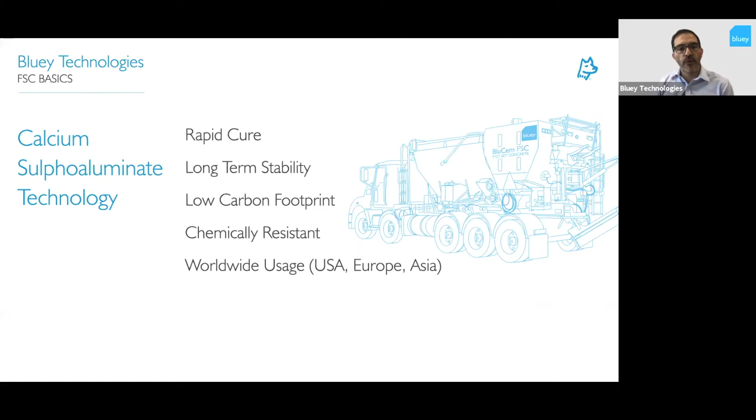So it's based on calcium sulfo-aluminate technology, a type of cement that provides rapid cure, long-term stability, a low carbon footprint, and less energy to produce than OPC cements. It's chemically resistant, and it also has worldwide usage over a number of decades now throughout USA, Europe, and Asia.

FSC, fast set concrete, what is it? What are we talking about? So it uses that CSA technology. It's a fast set cement binder system, and we use that binder to form a range of products. Products ranging from fluid grouts, which have a really pourable, highly pumpable consistency, available in 20 kilo packaging just to mix with water. Micro concretes as well, with small aggregates that can be used for small repairs, also a pre-bag product.

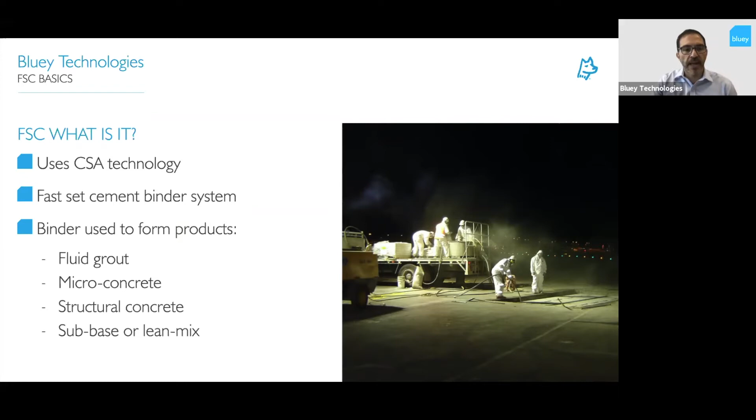Structural concrete, which is applied using weigh batching units, which we'll go through in this presentation. And we can also produce sub-base or lean mix for road applications. So there's a range of products that can come out of this fast set technology powder. It's just a new type of cement system.

So looking at the Australian experience and what we've completed here, and this is for our Southeast Asian participants, just to give you a bit of an update on what we've done. So back in 2005, it was probably one of the largest single applications of a fast set grout in the country. And that was when we upgraded Sydney Airport in readiness for the A380s, which were coming.

And you can see there a picture of General Holmes Drive, which is a tunnel which runs across the main runways and taxiways. Quite a length to it and crosses quite a few taxiways. It had to all be upgraded over a 6-month period for strengthening, and a fluid grout was used in that application to cast in precast beams, which would strengthen the actual tunnel. So that was the first really large application.

And in 2012, there were airport slab replacements which were undertaken, and that was the first use of a volumetric truck. And the volumetric trucks were a little bit in their infancy in Australia and have come a long way in the last few years, through to 2017, where we've had the first mobile weigh batching units. So they actually weigh the products as they come out rather than relying on volumetric scales to measure. So a lot more accurate by the time we got to 2017.

And then on the back of this accuracy in 2018, we saw a lot more application in airports, but also approvals by road authorities in Australia to use these products for road slab replacements, knowing that they could get the reliability.

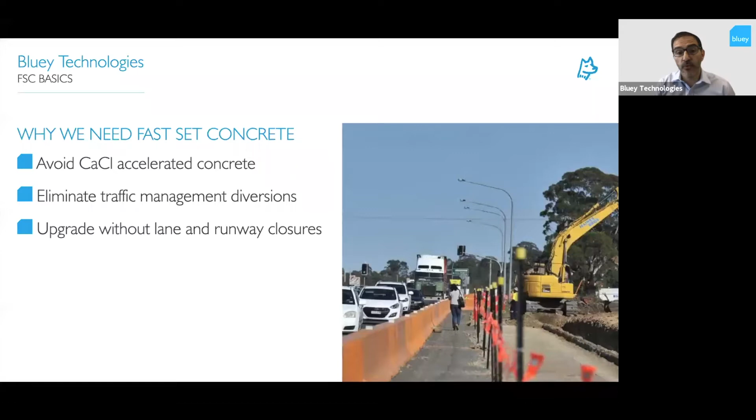So some of the advancements that have been made over the last couple of decades in this area is that the manufacturing process has improved a lot, so we can get far more repeatable results out on site in terms of strength gain and durability as well. We can demonstrate a 100-year design life for these types of products.

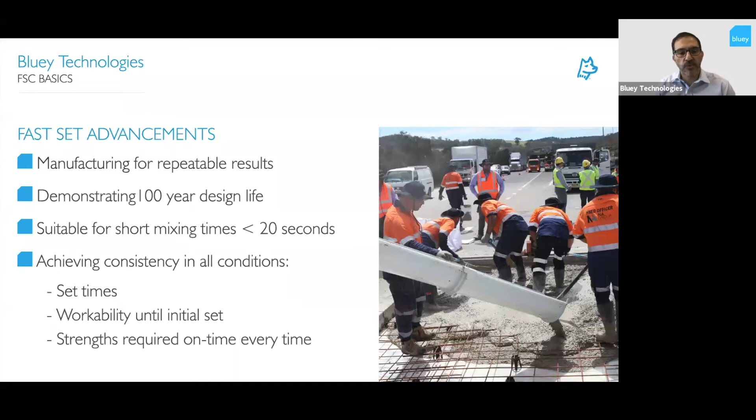We've shortened the mixing time, which makes these products suitable now for volumetric mixer application. I'll talk about that as well. And we can achieve consistency in all conditions. So the set times, the workability, and the strength development, whether we've got cold temperatures in the south of Australia, down in Melbourne or Tasmania, or whether we're working in Singapore or the Northwest Shelf at 30, 40 degrees temperatures, we can still achieve the same sort of strength development and set times. And we'll talk about how we achieve that as well.

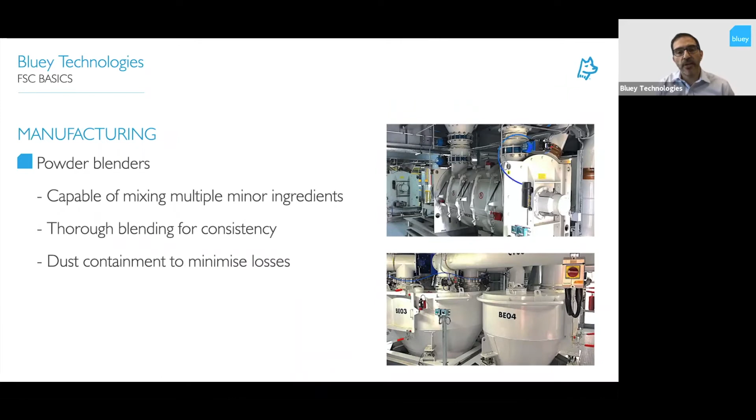So let's have a quick look at the manufacturing facilities. So the powder blenders that we use for this cement technology have to be capable of mixing multiple small ingredients very thoroughly. So the types of cement blenders we use are actually from the pharmaceutical industry, not from the cement industry, because they're more accustomed and better designed for mixing the product thoroughly. So the type of mixing devices are really important.

On top of that, we have a lot of controls in place over our raw materials that come into the factory upon delivery, but also we do a range of testing, not only during manufacture, that's an obvious one. Every time you manufacture the product, you have to do your full range of testing on each batch. But in addition to that, we're going through the factory. Every month, we're pulling out all the raw ingredients and we're doing type testing.

Now, type testing is something you would normally do once when you develop a product, but we're now doing this every month. And the reason for that is so that we can have constant data on the raw materials we're using in advance of them being applied on site. So we will already have the 28-day strengths before that product is manufactured and sent to site, which means that we get much more reliability and can identify trends and patterns in the raw materials over time.

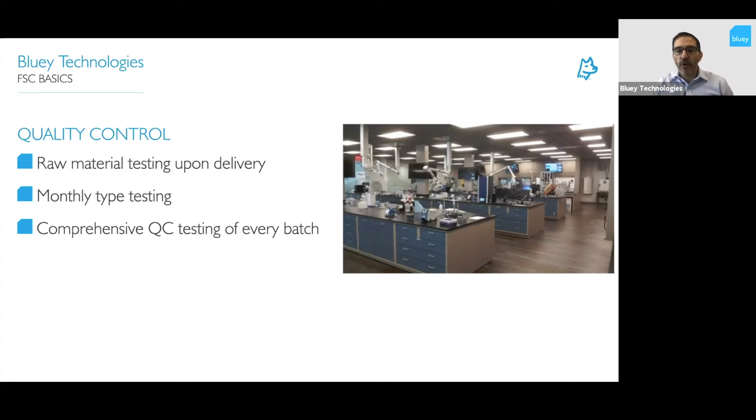So we've got that data, which is being done monthly, and we're also testing every single batch that comes out. And when we say every single batch, each batch would be around half a ton of powder. So that's a lot of testing.

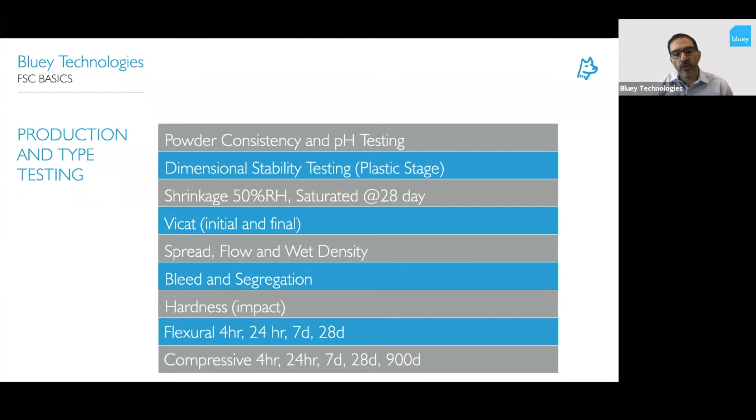And the type of testing we're doing, just to summarize some of those tests here, we've got powder consistency, we've got dimensional stability testing during the plastic stage, we've got shrinkage testing, bleed and segregation, hardness, and then obviously the mechanical properties of flexural strength and compressive strength. And doing that testing early gives us the opportunity to get that long-term testing before the product goes out to site and is put into application.

Durability for a longer design life. Now, I've got to say that 20 or 30 years ago, it was hard to believe that you could achieve fast set and a highly durable product all in one. It seemed as though you either had one or the other. But now we can actually say that we've got fast set products that are durable, will last the life of the structure. Previously, there were issues associated with fast set.

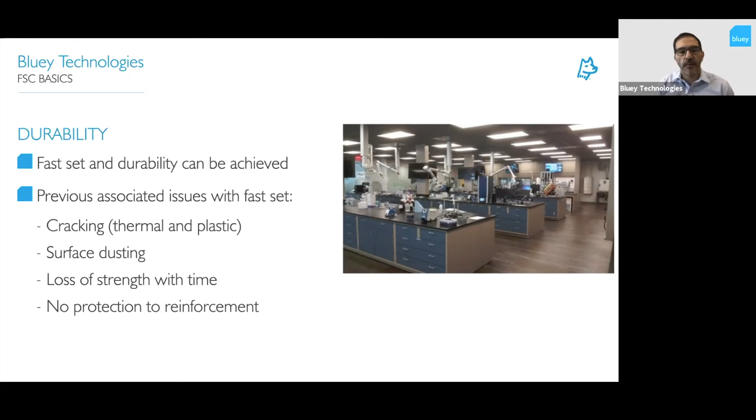People would see that you would get cracking, thermal and plastic, you'd get surface dusting, loss of strength over time, and they wouldn't provide any protection to the reinforcement because either they had chloride-based accelerators which would attack the reinforcement, or they wouldn't be alkaline, so they wouldn't provide that alkaline environment to passivate the steel. So these were all issues that were associated previously, going back maybe even 10 or 20 years. Now you don't see that.

CSA cements are very, very low shrinkage after initial set. We're talking shrinkages of around 200 to 300 microstrain, much, much lower than what you see out of concrete. But the standard shrinkage test in that regard isn't fully adequate. It gives you an idea of the shrinkage that happens from 7 to 28 days. And yes, CSA is a very low shrinkage in that zone.

But what's happening in the first 7 days, and particularly with something that's curing so rapidly, you really need to know what's happening. So we do a volumetric stability test during the plastic stage, and we're actually monitoring the volume movement and change during those early stages, because we know that that's a high risk with calcium sulfoaluminate cement systems, is that you can get plastic cracking in those early stages. Some of you may have had experience in seeing that out on sites. If the product is developed well, you won't see that plastic shrinkage cracking.

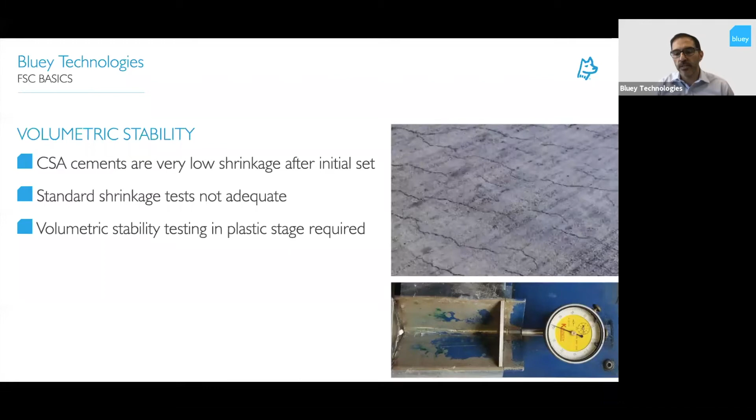So all of this leads to us looking at how we can determine the 100-year design life. And there's a lot of factors that we've tested and put forward as reasons for making that assertion. So the shrinkage on the product, as I mentioned, is less than 300 microstrain. We have a very low chloride content, so we know that's good for the steel reinforcement, less than 0.005%. It's low in soluble alkalis, and we have no residual sulfates.

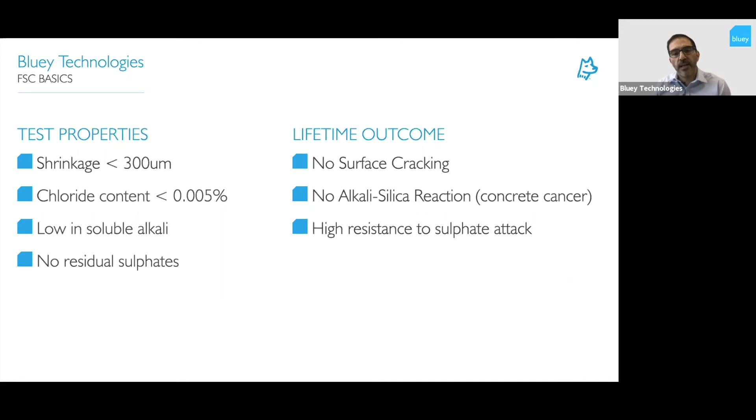So the lifetime outcome for those items is that you have no surface cracking, you have no alkali silica reaction, concrete cancer, and you have a high resistance to sulfate attack. So we know that those bases are covered.

We also complete NT443 testing, and we know that we have a very slow migration of chlorides through this type of cement system. We know that it's very high density, and we know it's low in permeability. So we also have no surface dusting and excellent wear resistance. So again, all lifetime properties that we know will lead to a longer life outcome.

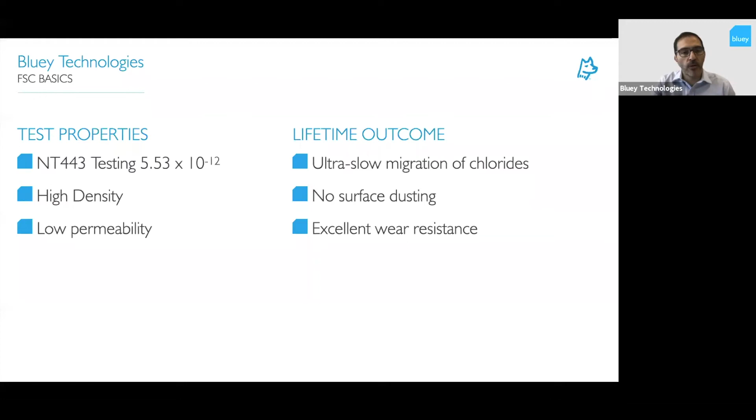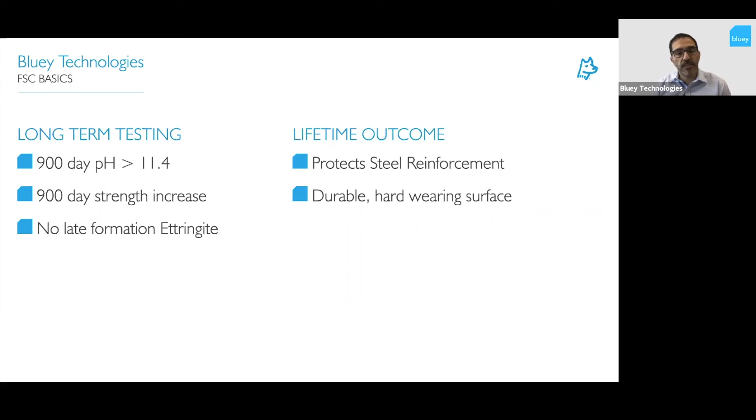On top of that, we've done long-term testing on pH. So we know that the alkalinity is maintained for more than 900 days. And we also know that we have a 900-day strength increase, and both of those things lead to protection of the reinforcement and a durable hard-wearing surface. On top of that, and finally, we know that we have no late formation ettringite, which can be a question around CSAs and needs to be tested for prior to delivery of the product.

So what we look at is the long-term testing, and most people are only interested in fast set cement. You know, what's happening in the first few hours? What's my strength at 2 hours? What's my strength at 3 hours? Sometimes they might ask you, what's my strength at 28 days, but not very often, because by then the item is usually put back into service and forgotten about.

But long-term strength gain is actually really important in these products because the reaction actually continues over a reasonable period. In fact, the strength keeps gaining for many days. You know, we've gone past our 28, 56, 112, 224, 448 days, and we're still seeing a strength gain. So there's still something happening within the product. There's still a reaction occurring. And we know that doesn't level out until around 500 days when the reaction is complete.

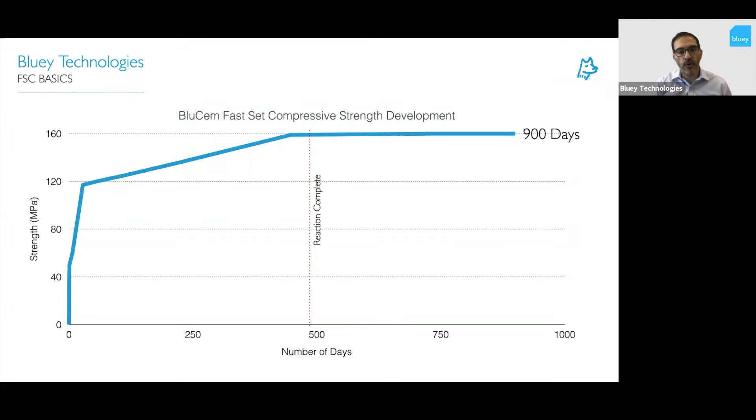So what we want to make sure of is that the actual reaction that's occurring between 28 days and 500 days isn't having a negative impact, because we know that that's when ettringite is forming. And if you have an oversupply for that ettringite crystallization, then it can break down your cement structure. And if that breaks down your cement structure, then it can lead to a reduction in strength over time, like this. And this has been seen, if we go back maybe a decade, 2 decades ago, in some CSA systems where the strength gain after a couple of years was noticed to drop off and there was powdering of the surface and a reduction. So this is something we avoid by doing the long-term testing.

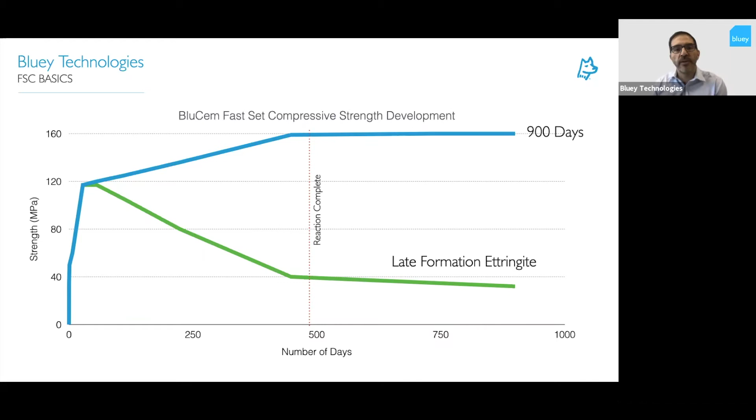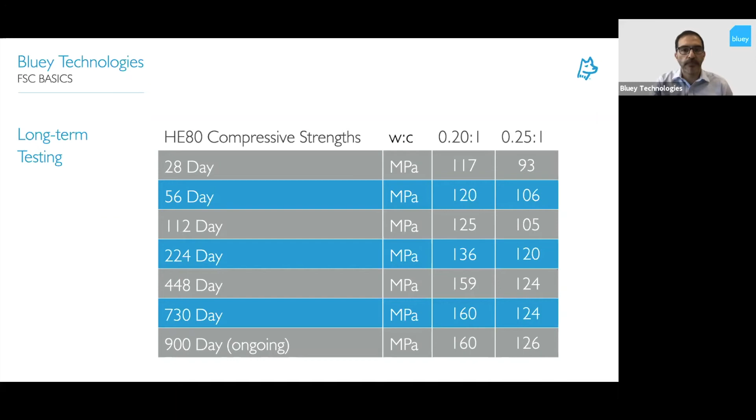So looking at some of the application systems, I mentioned volumetric trucks earlier, and these have changed the way we apply fast set products, but in themselves, they've also changed, particularly over the last 5 years or so. So what it is, you have powder and aggregate bins, which are separate. So you have your cement powder, and your sand and aggregates, which are put into separate bins. They drop down into an auger, and then that's mixed off a conveyor belt through that auger, and the mixing actually occurs at the point of placement. So we're not adding water to our powder until we're actually ready to place the concrete. And what that means is you have unlimited travel time with the products.

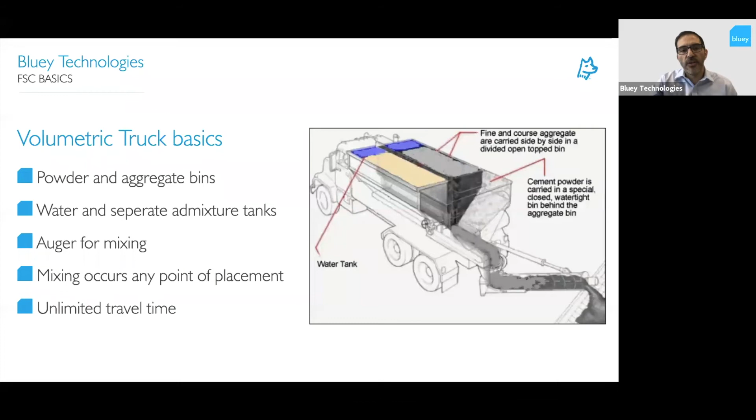Whereas if you were using a concrete agitator truck, you would have to put all your powders in, put your water in, and drive it out to site and hope you got there fast enough before the product went off in the truck. So that's the difference with a volumetric based truck, which has now turned into a weigh batching unit, because there's been some equipment advances in this area.

We now have computerized mix design and calibration, so it's all controlled by a computer. The trucks can move and pour continuously, so you don't have to stop the pour to move the truck forward. And that's a really important feature to maintain consistency of your pour and avoid cold joints. And we also have continuous weigh batching on the powder bins, which is what I mentioned was the really big advancement where we went from volumetric trucks to weigh batching units.

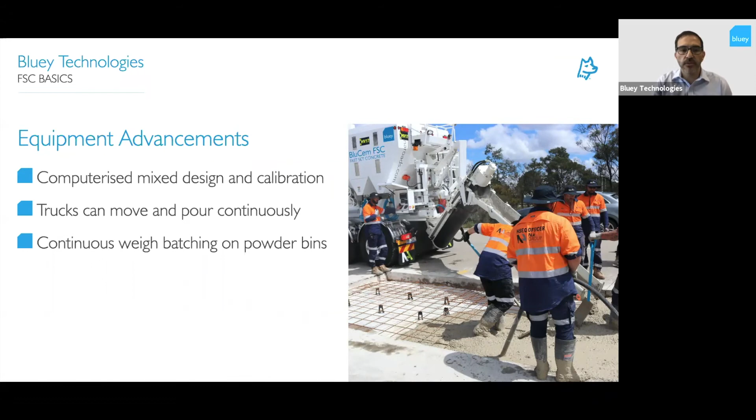And what that means is that on your powder bins, you have load cells, which are continuously weigh batching the powder as it's delivered from the powder bin. And it gives you really high accuracy on that powder delivery, which combined with electronic controls over your water delivery gives you an extremely accurate water cement ratio all the way through your pour. So you know you're going to get the strengths you want, you know you're going to get the consistency you want all the way through the delivery of that product.

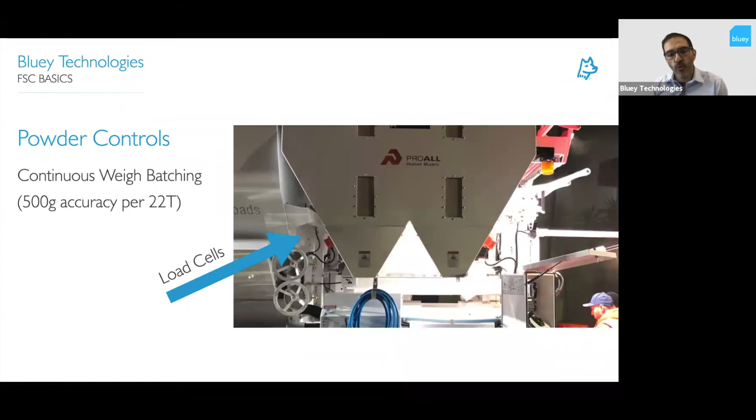Besides the trucks being advanced, we've also had material advancements, as I've touched on already. So the total mixing time now is less than 20 seconds with these trucks, as opposed to with an agitator truck, which might have been mixing for even up to 20 or 30 minutes before the concrete was poured, or where you're using a grout mixer where you had 3, 4, 5 minutes of mixing time before you had to apply it.

Now you can see in that photo the little black section there, which I'll point to with my arrow, this section here. This is an auger in here, and the powder and the water all gets delivered into that bottom point there, and then it gets shuffled up this chute, and as it's getting shuffled up by the auger, it's also mixing at the same time. But it only allows around 20 seconds of mixing time.

So we've had to put additives in the product and change the way it was designed so that we can improve the, let's call it mixability of the product. So we've changed the ingredients to suit that application. And full mixing means that you achieve more consistent results. So you're getting more consistent set times, you're getting more consistent rheology, and you're getting more consistent strength gain. And mixing is a really important part of that.

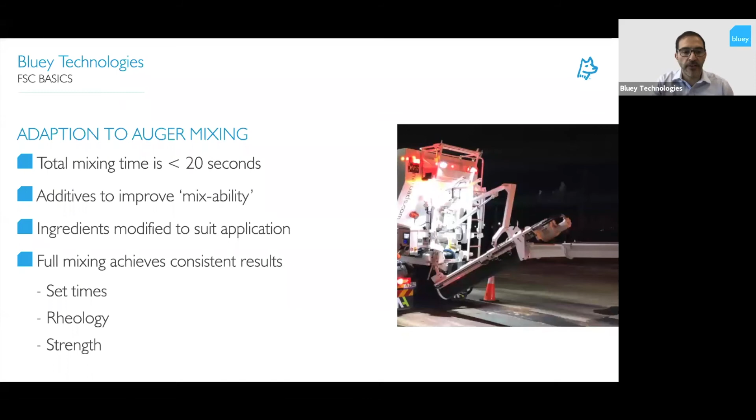We've also added some changes to the raw ingredients. One thing we realized was that the product itself on mixing was changing in its rheology over time. So as it came out, it had a fairly low slump. And then after about 2 or 3 minutes of vibration, it had a really high slump. And what we're finding is that the plasticizers that were being added in a powder format were taking a few minutes to dissolve. So we actually converted those to a liquid plasticizer, which means that they were active immediately.

They're part of the computer-controlled delivery process with computer-activated pumps so that we know we're getting the right delivery of plasticizer. And that allowed us to get a much more consistent product for finishability, workability, and spread as well in the slab. So we're getting much more consistent results in our rheology now.

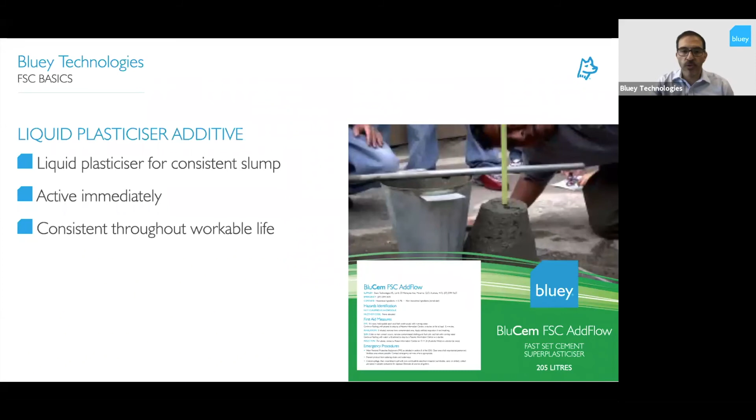One of the biggest changes we've made though to the product is the liquid dosed retarder. So the product has always been retarded using a powder retarding agent, which was added at the factory. Problem with that is once it's added at the factory, it didn't matter whether you had a 40-degree day or a 5-degree day, which honestly can happen in Melbourne, just wait for it to change. You were stuck with that powder that was delivered. You had no control over it.

So every 10 degrees of temperature change in the ambient temperature would either double or halve your set times. So if you were hoping for a 30-minute set time and suddenly you had temperatures which were 10 degrees hotter than what you were expecting, you would only have 15 minutes of work time. And that's a pretty big hit to take in terms of the amount of work time. And then on the other hand, it could go the other way as well, where you don't develop the strength in time.

By adding a liquid retarder with controlled dosage through the truck, we can actually set the amount of retarder that we're adding to the powder so that we can set the work time to suit the ambient conditions. So whether we now have a 5-degree day or even closer to 0-degree day, or a 40 or even 45-degree day, which we've worked in before, we can actually have a set time set at 30 minutes or 40 minutes as per the contractor's instructions.

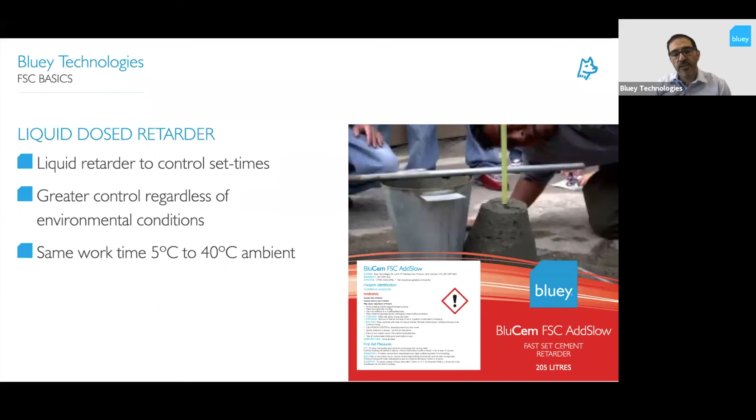So we can now modify the set time on the product to suit the ambient conditions, which has made a really big change to the way we use fast set products. Just a summary of the properties that we achieve in terms of compressive strength and flexural strength at the different times, just in this table here.

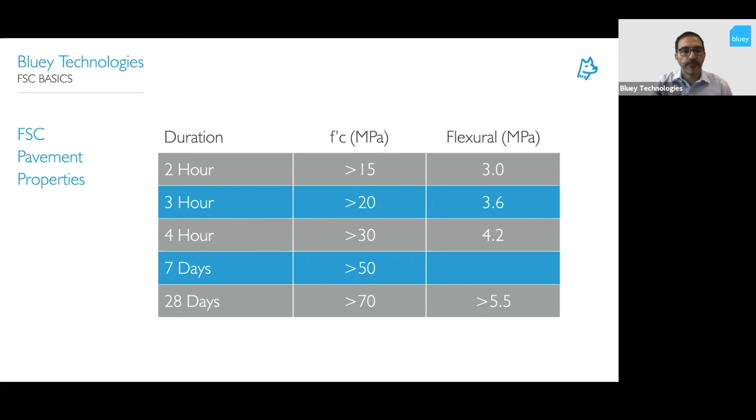So moving on to site testing, just to finish up, and I won't go into too much detail on this because we're actually presenting in full on this topic tomorrow at the same time on maturity testing and why it's required. But site testing does come with some challenges when you're talking about fast set products. One, the work is being done of an evening, so your laboratories aren't naturally open. They have to be open for the work.

On top of that, you can have cold temperatures. It also means that you have to transport the cylinders quickly to the lab without damaging the cylinders or having an effect on them. And the chance of that cylinder being representative of what's happening in the slab is pretty limited in this type of application when you've got such fast set gain.

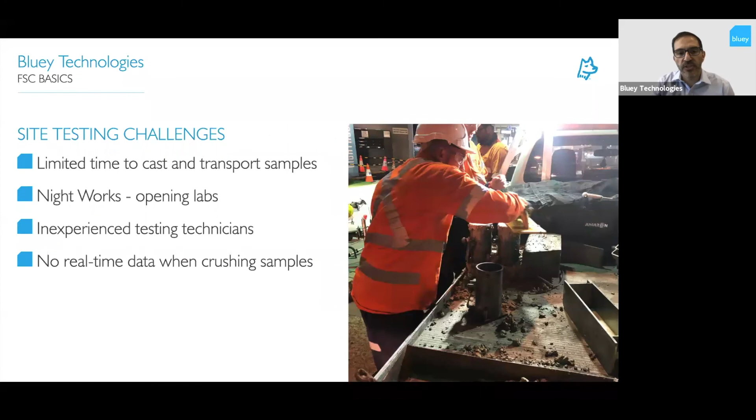And what we'll show tomorrow when we're talking about maturity testing is that there's a difference in what you find in cylinders compared to what you're seeing in the slab in terms of strength development. And there are ways around measuring that. So we need real-time data when crushing these samples is what it boils down to.

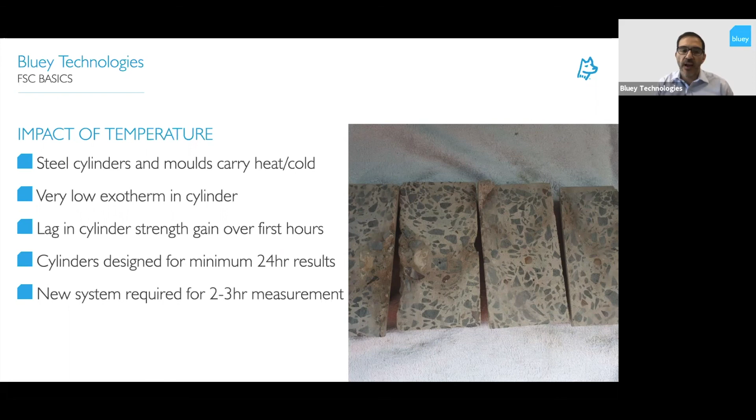The cylinders have low exotherm. They actually hold a lot of the cool. They don't allow the concrete to generate its natural heat, which means there's a lag in cylinder strength over the first few hours. So the cylinders aren't truly representative of what's happening in the slab. Cylinders are old technology, and that's why we needed this newer system for 2 to 3 hour measurement, which is our maturity testing. And again, we'll talk about this in the maturity testing presentation.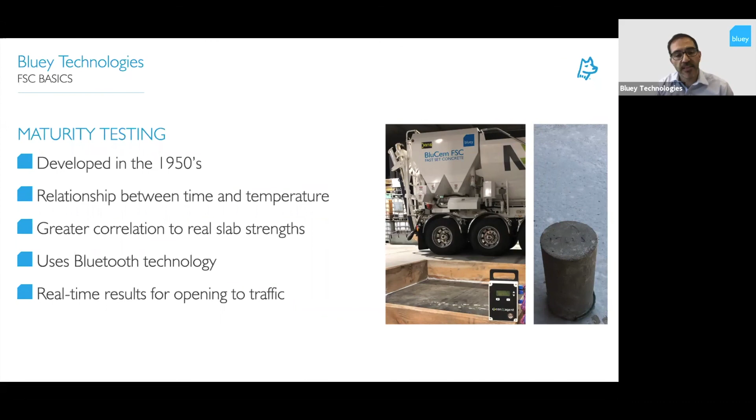It was developed in the 1950s, so it's got a long track record, but it's really only been commercialized more recently, particularly with the advent of wireless and Bluetooth technologies, which has allowed us to put probes into our slabs at a fairly low cost, and that technology can then provide real-time data in terms of the strength gain so that we can have reliable information on when to open our slabs to traffic. So really interesting topic this, and some great advances in the technology, which we will go through in the maturity testing presentation.

So just in summary and finishing up, high early strengths and durability are possible, all in the one product. We can achieve greater productivity, even though we have limited access, by using fast set concrete and cement products. We have a lower lifetime cost than using a calcium chloride accelerated product, and we can now achieve very consistent quality and delivery, particularly with the backup of that on-site testing, which can be accurate and in real time.

So a lot more reliability around fast set products, whether you're having them delivered by a weigh batching unit for a larger application, or even if you're just mixing a 20 kilo bag of a grout or a micro concrete, you've got a lot more reliability in those products.